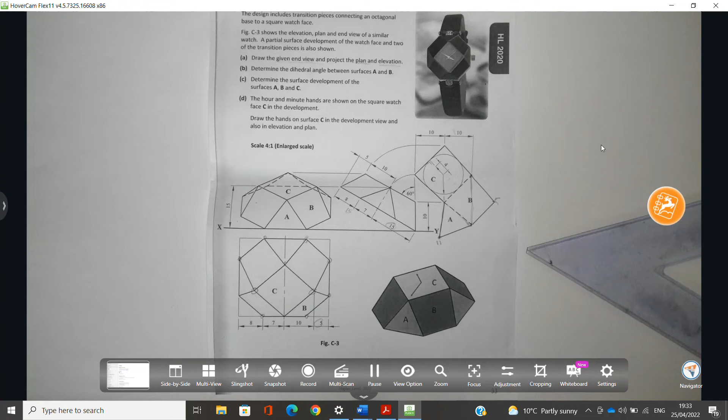Okay, so welcome to this drawn video on the 2020 higher level question C3. Okay, so surface geometry. Now it's based on a watch there. So the image on the right, design includes transition pieces connecting an octagonal base, so 8 sides, to a square watch face. Figure C3 shows the elevation, plan and end view of a similar watch, and a partial surface development has been shown.

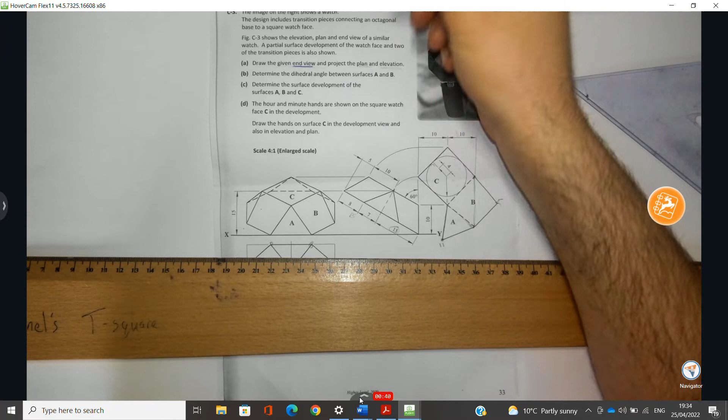Part A, draw the given end view. So that's a hint to draw the end elevation first. Then project a plan, so that's number 2. And 3, draw the elevation. Now, it's 60 degrees off vertical there, so the base is at 30 degrees. The scale is 4:1, an enlarged scale, so we have to multiply everything by 4.

So 15 by 4 is 60, 7 by 4 is 28, 8 by 4 is 32, 5 by 4 is 20, 40 there, and that's 40 there as well, and 10 by 4 is 40. Okay, so I'm going to draw my XY line in, and I'm going to draw my end elevation. So it's a vertical face here on the side, 10 high, so that's going to be 40 high,

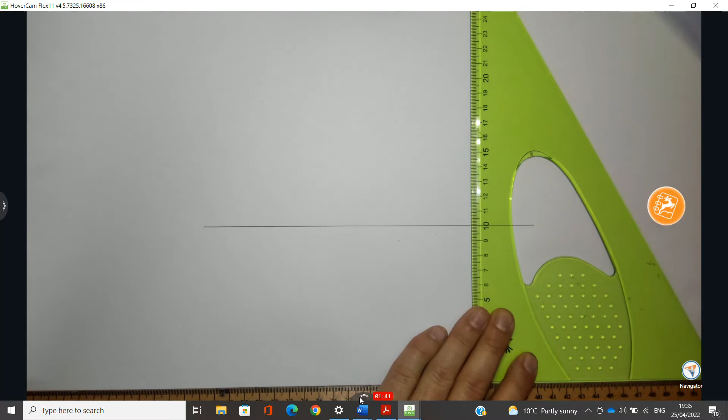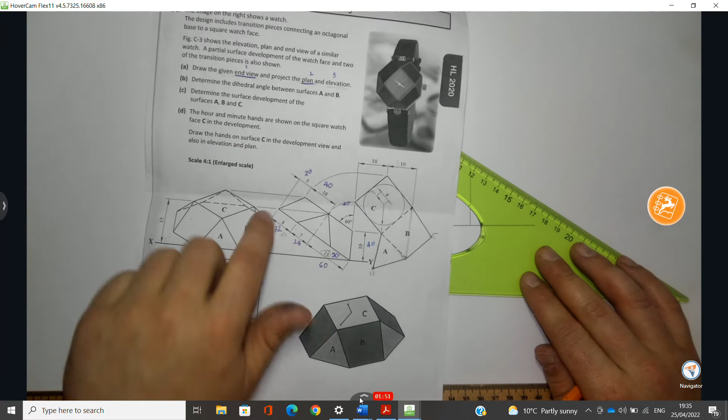and then on the bottom, it was 60, 28 and 32, that's 120. So I'm going to draw a line at 30 degrees, 120 long, and on the top it's 40 and 40, so added together is 80. You can connect them together. Then along the bottom, 8, so that's 32, plus 28 is 60, and then the same on the far side.

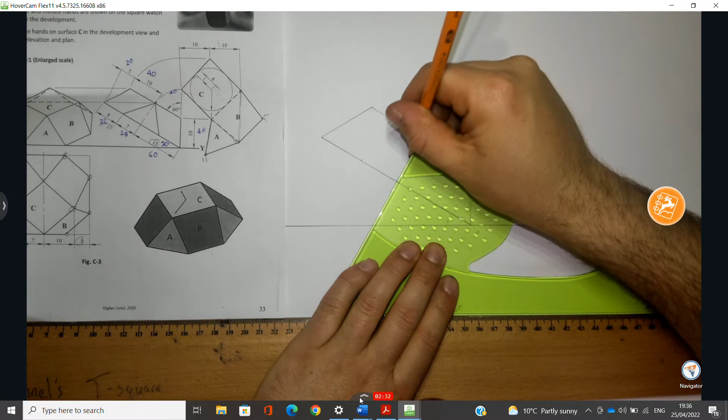So there's my center line, and there's one of the faces there drawn in. There's our end elevation complete. Just want to draw in a YY line. Now, the next thing we have to do is draw the plan view. And before I draw the plan view, I'll be labeling these points. So I'm going to call that A, B, C, B/C, D. So there's point D.

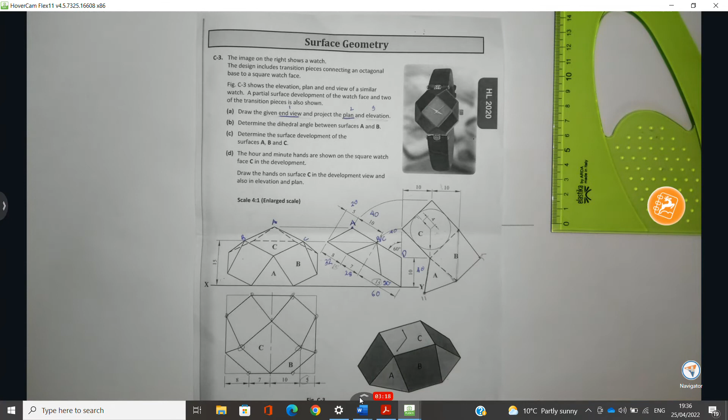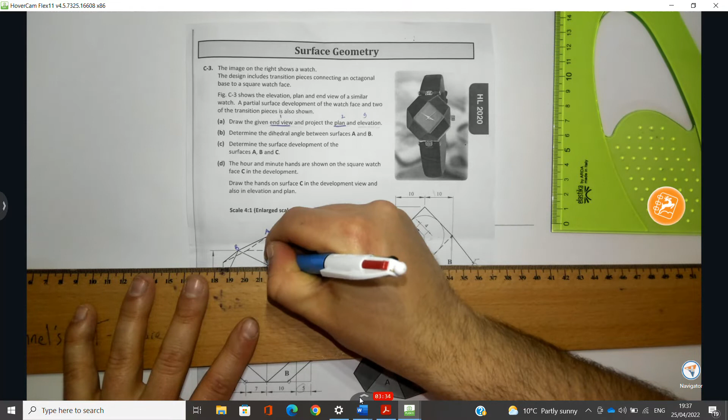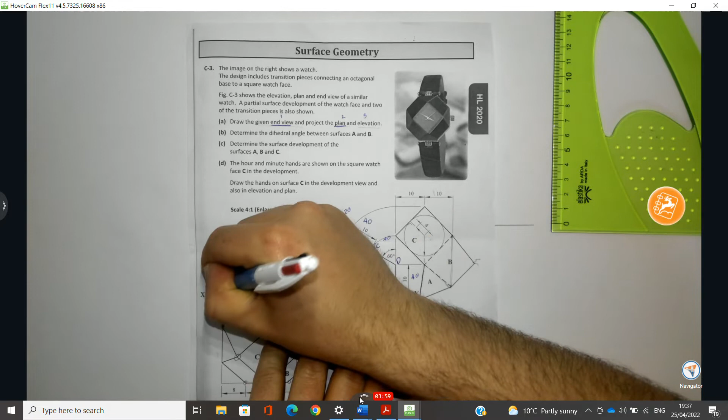If you were wondering where exactly point D is, what you could always do is use your exam booklet to help you judge where points are, but don't even think about measuring anything off it. D, E/F, so there's E, F, G/H, so G, H, I/J, and then K/L.

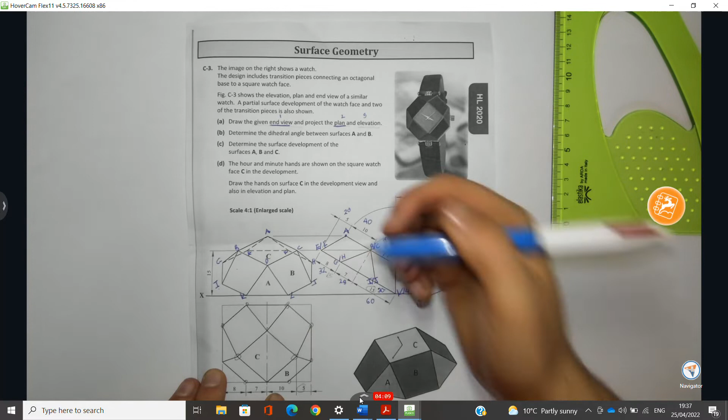Now, down in plan, again, this would be used to help you on your exam booklet. You could be doing this to help you figure out which point is which, because they're not easy to figure out for some students. Now, which one am I? Oh, sorry, I drew that 45 degree line there in the wrong place. So there's obviously going to be K and L. There's going to be point D.

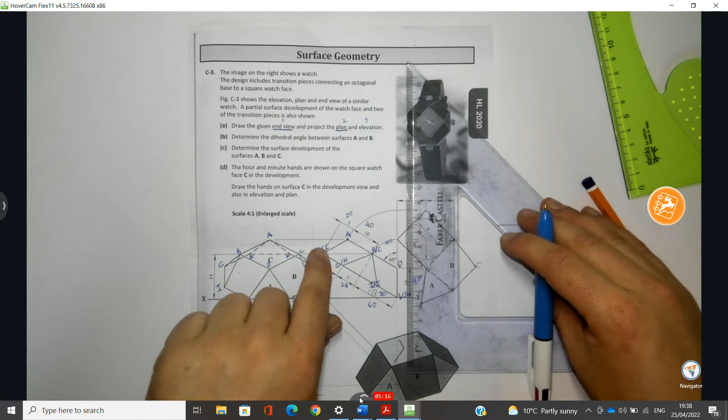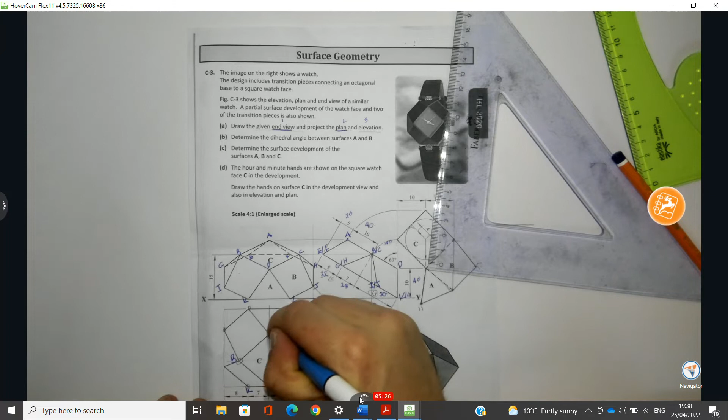So anything on the top face, like this is going to be B and C, and it's a square face there, and then the outside is the octagonal base, which is the bottom, and you can see B and C here when you bring them down and across, that's where you're going to get them. That's point A. Then this is I and J, and then G and H and E and F. So that's a good help to getting the letters in there. Right, so we get cracking then. B/C, D. I'm just going to pause this and write in all the letters.

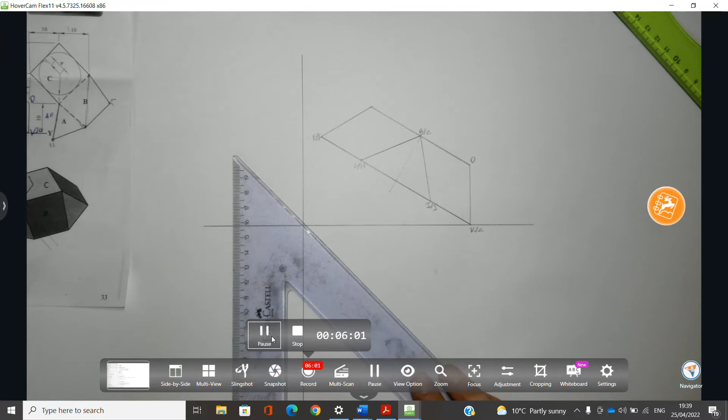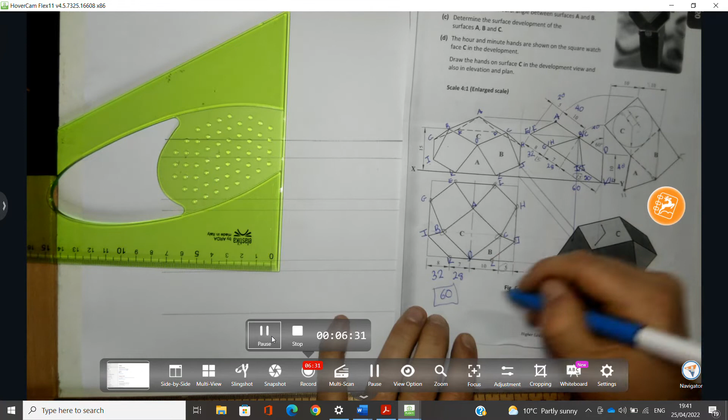Now that's done, I'm going to draw in my 45-degree line. I'm going to drop my points down from end elevation to my 45-degree line and bring them across to the plan. So that done, now I'm going to focus on drawing the plan view. So these are dimensions. 8 multiplied by 4, the enlarged scale, is 32, 28, so that's 60 together, 60 there again, and then point C is in 5 there, which is 20.

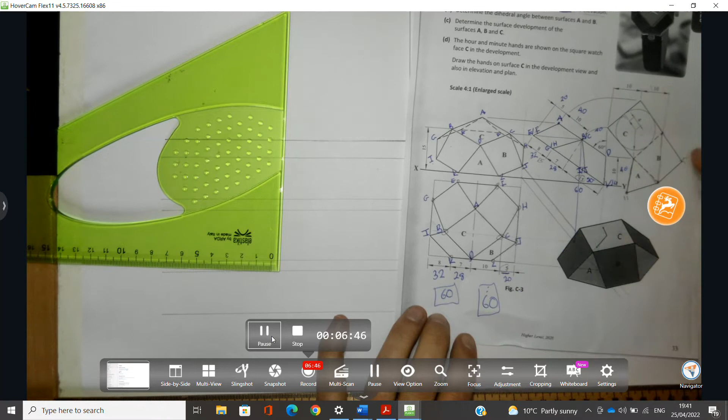Okay, so I'm going to set that out. So 120, center line there, 32, and the 20 there for the opposite side. And then our 5 in from the side multiplied by 4 is 20, then 32. And that's the end of it there. Right, so I'm going to project those lines up. And the width of it was 120. So I'm projecting these lines up.

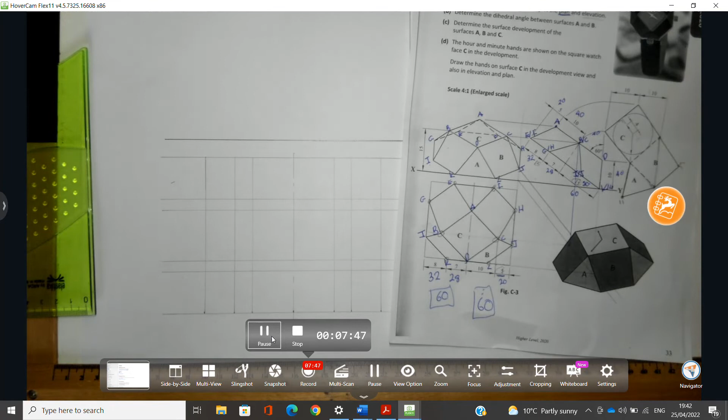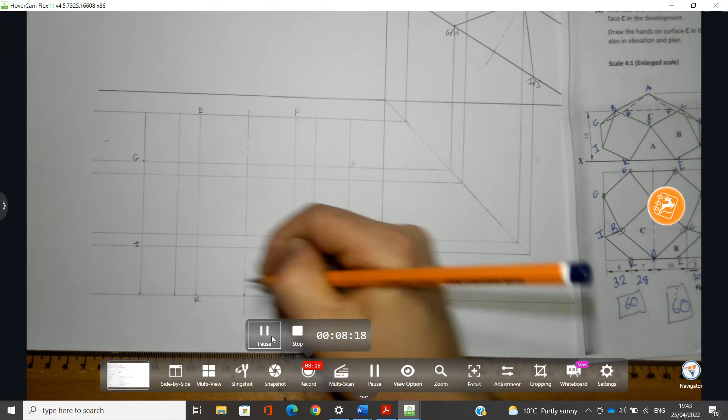So here we have letter E, F, then H, G, I and J, and then K and L and D. Right, so I'm going to connect them together.

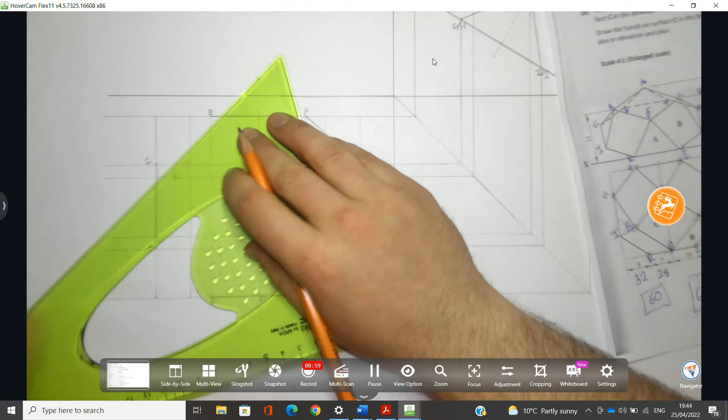Sorry there, my head hit off the visualizer.

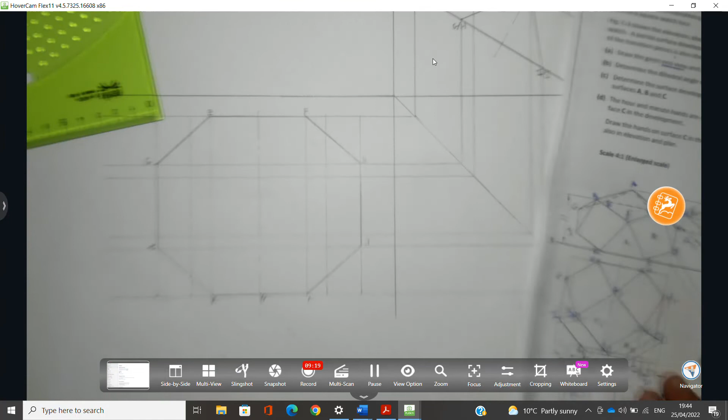Now, so we have them done. Now we're looking to get point A, B, C, and D is already gotten. So B and C down there, and it's where C and B will be hitting the, 5 multiplied by 4, 20, so they're in 20. So B and C down here, there's point C, there's point B, point A is down across in the center, and that's them ready to be joined together.

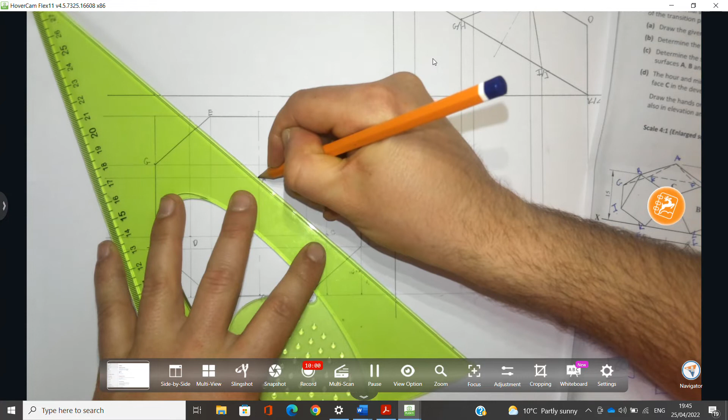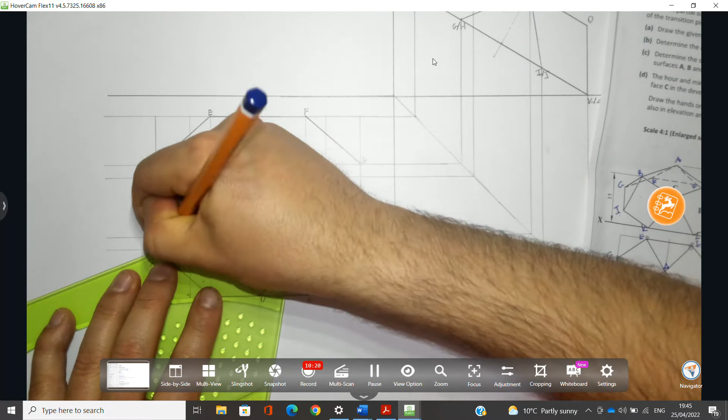So I can join A to C, C to D, letter D. Oh, sorry there, what I should call that should be B. Okay, D to B, C to I, C to H, C to J. Right, there's surface C, surface B, surface A projects as an edge.

Now, to draw the elevation, I'm going to pause the video myself. I'm going to bring these points across from the end view, and these points up from plan. And then I'll mark them in with you. They're brought up and across. You can mark them in.

Okay, A and D. E slash F. G. I. Over here J and H. And then K and L. Right, now we're ready to mark them together. So K to D and L.

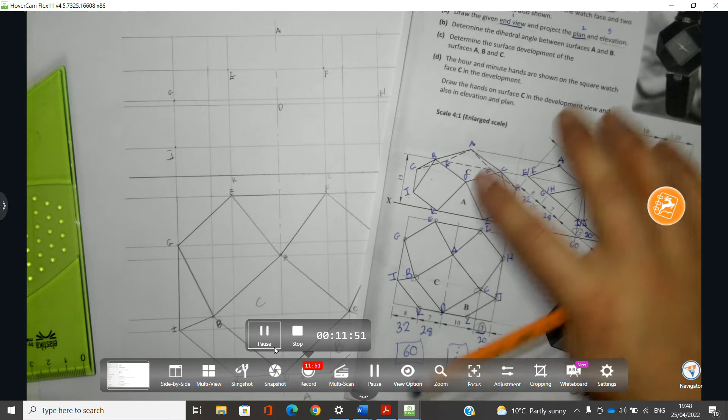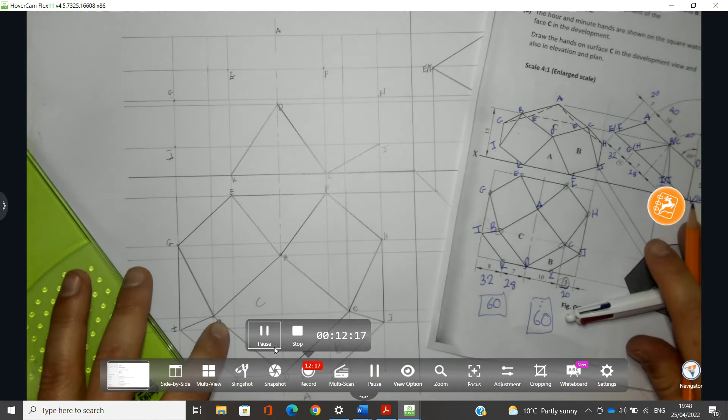L to J, C and H. Sorry, not L to J, C and H. L to J. And have I B and C marked in? I don't have B and C marked in, so I have to do that. So here's B there. And then C is there across.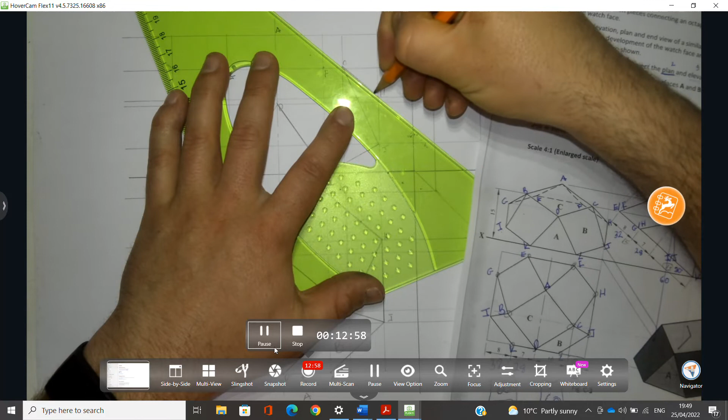Okay, now where was my train of thought there? Right, J to C, C to H and H to J. So J to C, C to H, H back to J. And C back to D. C to A. A to B. B to D.

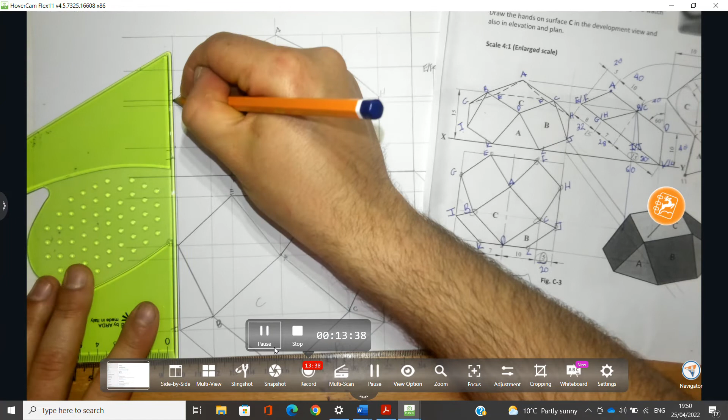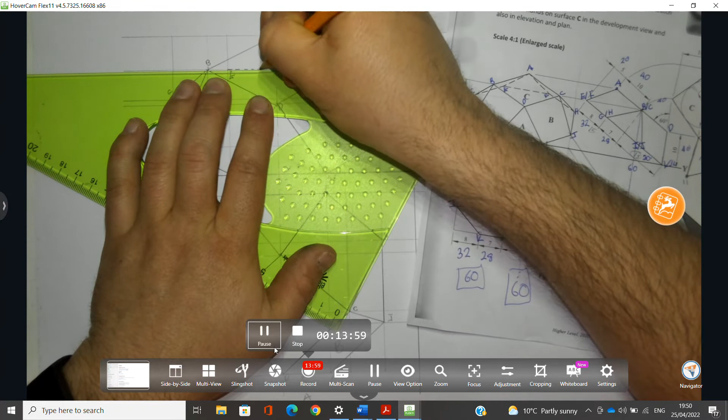B to G. G to I. I to K. And I to B. E to F as hidden detail. A to E. And then E to G and F to H.

Oh, you fecker. Right, I'll have to fix that there.

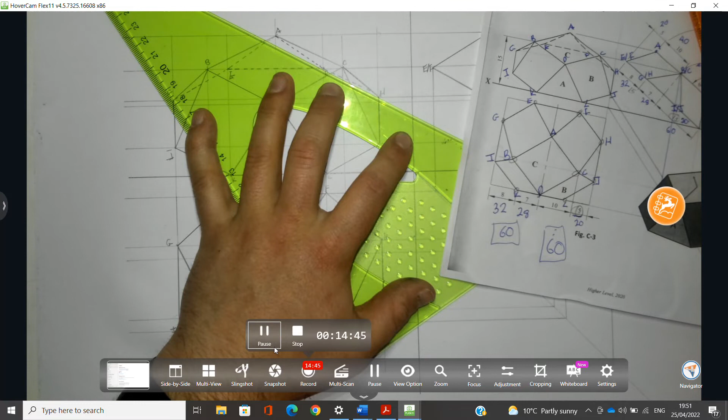So there's surface A, B, and C. Now, part B, determine the dihedral angle between surfaces A and B. So, you have to look for the line of intersection between A and B. Here's the line of intersection in elevation. Here's the line of intersection in plan.

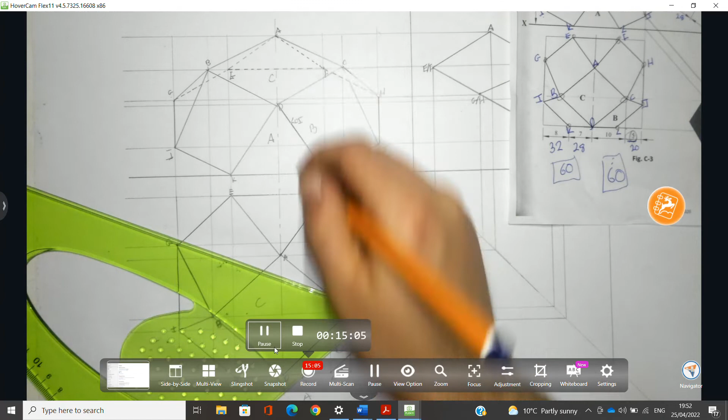You have to check, is the line of intersection a true length in either plan or elevation? And it is a true length in elevation. So line DL is a true length because it's parallel to the XY line in plan view. So I can look along that line of intersection DL immediately. So many people would try to look perpendicular again to DL, and it'd be immediately the same thing in elevation.

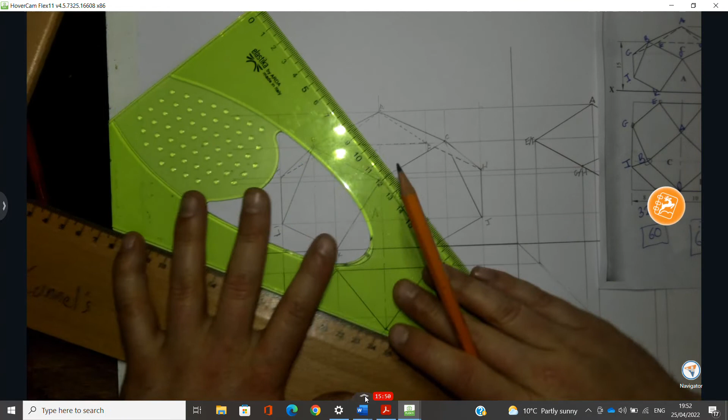So I'm going to look along line DL here in elevation, which obviously is unusual to most students because they're used to looking along the line of intersection in the second auxiliary or projecting from the plan view. So I'm going to draw in a line parallel to DL from points K and J as well as D and L. I'm going to draw in an X1 Y1 line.

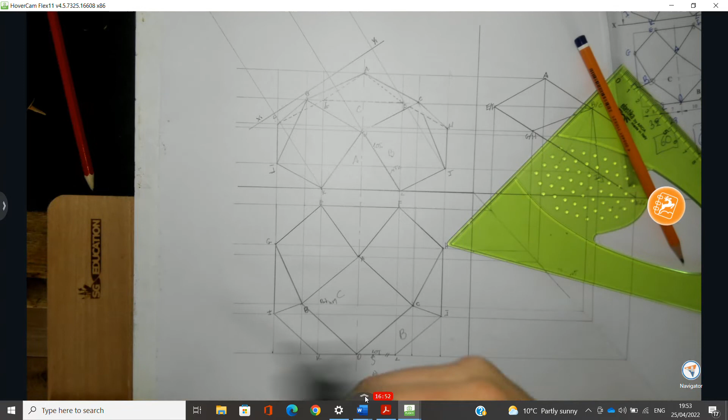Now I'm going to take the distances from my XY line down to plan. I'm going to use a datum line because it would require a fair bit of room. So I'm just going to use this as a datum line. I'm going to get my compass and take the distances from the datum line down. D and L are going to project as a point. Just going to mark that in. That's D slash L.

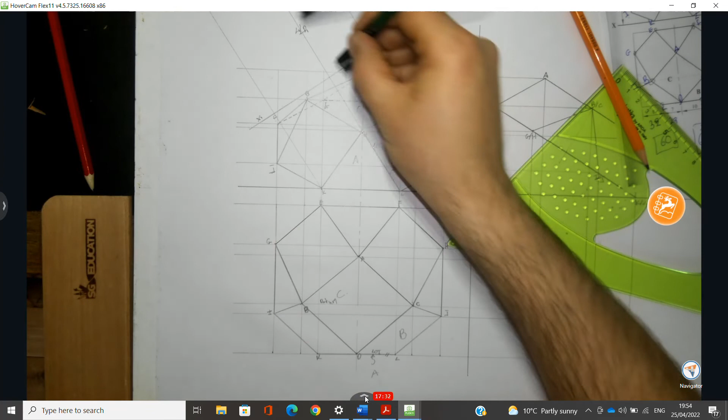D1, and then I'm going to take the datum line down to J. Here's the datum line down to J. Lift, follow J here. Mark that in. That's J1, and then I need to get K. Okay, and that's going to be the same distance as D and L. I'm going to project mark from K. So there's K1.

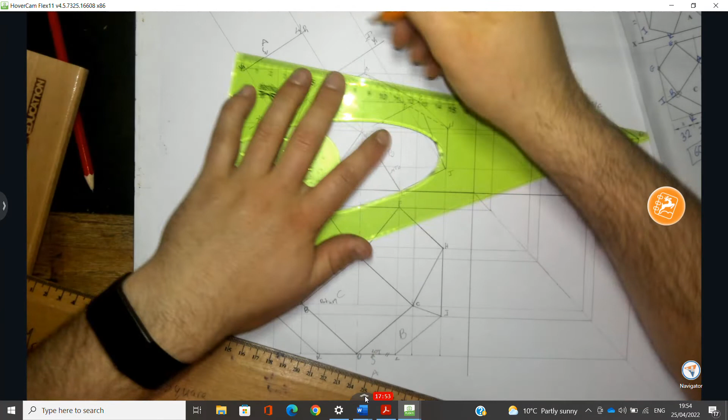So there's surface A as an edge. Okay, here's surface B as an edge view. Okay, and then I'm going to measure the angle between them. So I'm getting 143. So 143. Okay, now part C.

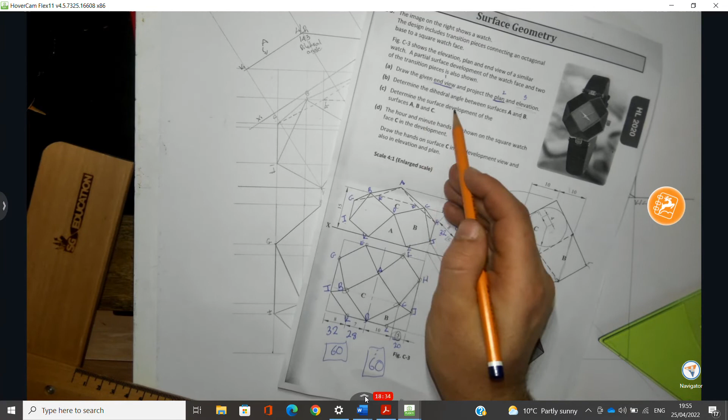Okay, determine the surface development of surfaces A, B, and C. So this is the partial surface development, and remember what side. Oh yeah, you would have been able to see that dihedral angle. Hope so. Anyways, right. Remember what they give you on the question is your greatest hint. So look what they've done there.

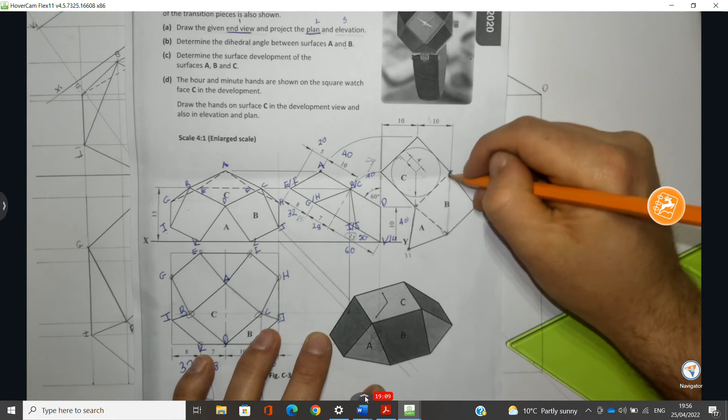They've rotated surface C up, okay, until it's vertical, and then they're projecting a view perpendicular to that, and there's the surface development. So surface C is easy enough, and then A and B we can find using triangulation, by splitting the quadrilateral up into two triangles.

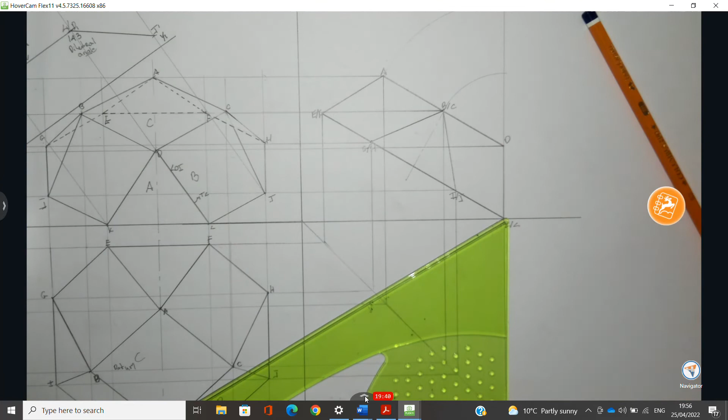Right, so I'm going to draw a vertical line from D, and I'm going to take my compass, rotate B and C up onto that vertical surface, and then I'm going to project parallel to the XY line. Sorry.

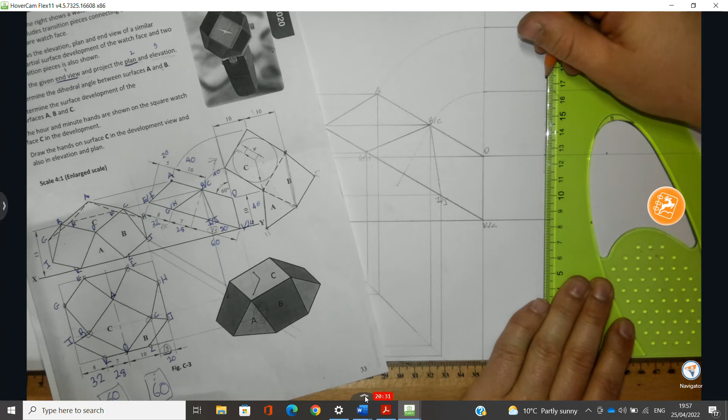So they tell you a dimension of 10 and 10, so that's 20 in total, multiplied by 4, scale 4:1 is 80, so I'm going 80 in total. There's the center line. It's obviously going to be a square.

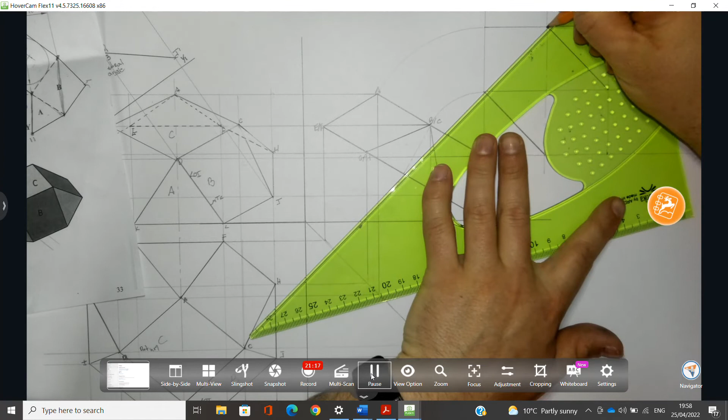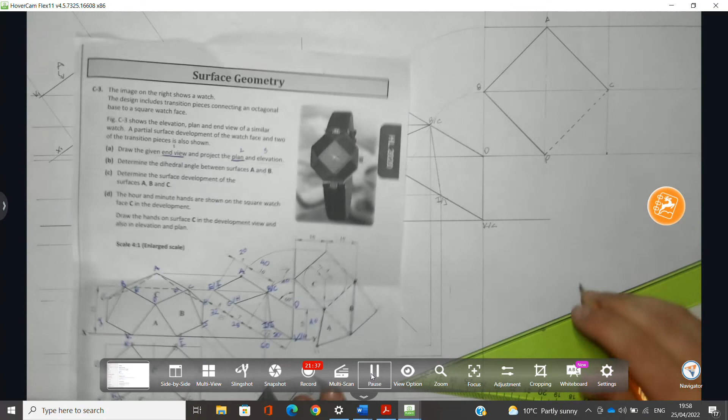Here's the fold line. Now, okay, so that's surface C. Alright, so that's A, B and C, and that's point D. So that's B, A, C and D. So we have D, we have A up here, B and C. Okay, now we need points K and L on surface A.

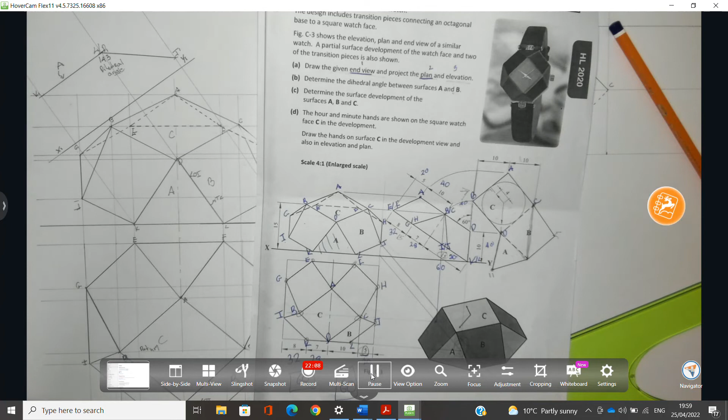Now this is the true shape here in elevation because it projects as an edge in plan and the edge view of surface A is parallel to the XY line, aka the vertical plane. So D to K and D to L are already true lengths, and so too is K to L because it's parallel to the XY line in the plan. So to do surface A, I'm going to take D to L here. It's true length in elevation. This is what developments is about, being able to recognize what true lengths you have and how to find them.

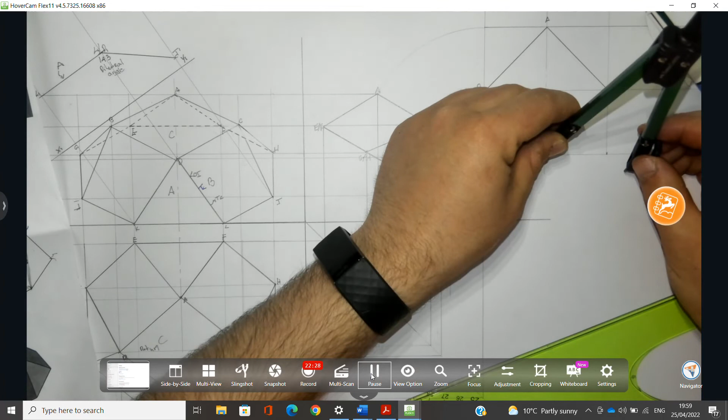So I'm going to swing an arc with the radius of D to L there, radius D to L. Now, somewhere along that arc is point L, but where exactly? Now I have point C on surface B, and I can find, sorry, what do I call that letter? That's going to be D, K, and then L, yeah. So I can find the true length of that line C to L. So what we're doing is splitting surface B, a quadrilateral, into two triangles.

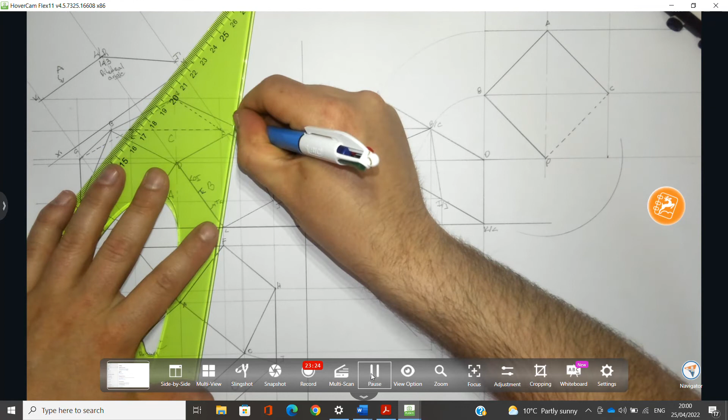So here's the line. Here's the line C to L in elevation. Here it is in plan, C to L. I'll move my visualizer now. So I'm going to find the true length of that line C to L. So I can take my compass, rotate C to L in plan until it's parallel to the XY line in plan. I'm going to bring it up.

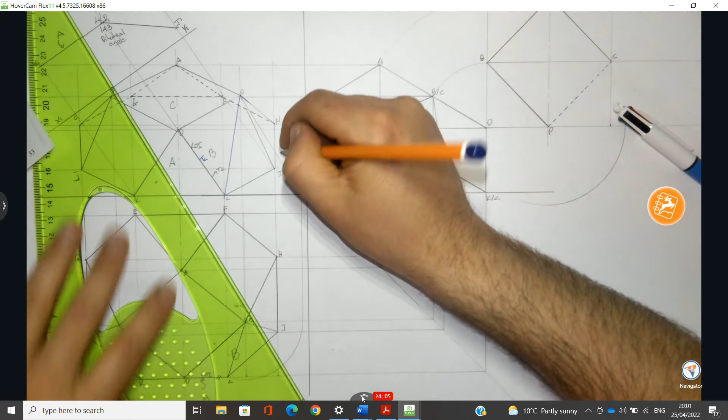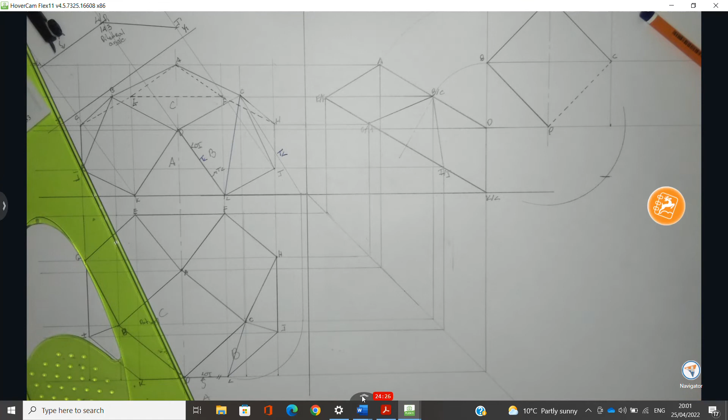Until it hits the XY line because L is on the XY line, and join back to C. Now here is the true length of C to L. So I'm going to take that distance with my compass, the true length of C to L, and I'm going to swing then from C. Now, there is point L on surface A, so I can join them together.

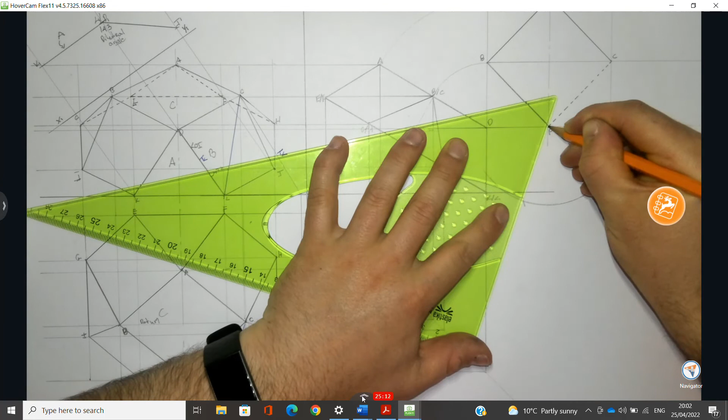Okay, now I can continue that arc. D to L and D to K are the same length, because they're symmetrical. So now to find out where K is, I can take L to K in elevation because it's parallel to the XY line in plan, or I could take L to K in plan as it's parallel to the XY line in elevation. So I can swing that there from L and join D to that. Where that arc swung from L intersects this one, swung from D, that is point K. And I can join them together.

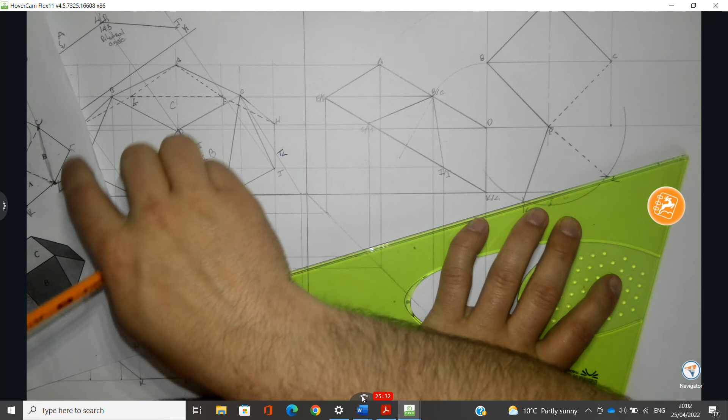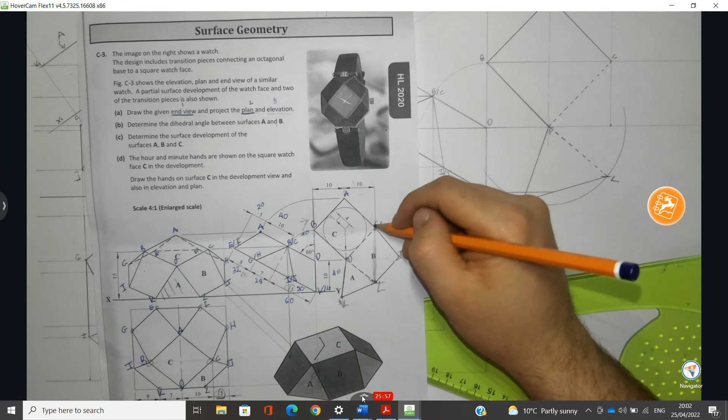Now, the next thing we have to do is find the final letter on surface B, which is going to be point J. So I'm just going to join them together. So I need to find, on surface B, point J. Right, so I have point C. If I can get the true length of L to J, I can split this into a triangle as well. D to J is the easiest way to find it. You could find the true length of C to J either, that's fine. I think the longer the lines are, the quicker and more accurate it is. So I'm going to join D to J.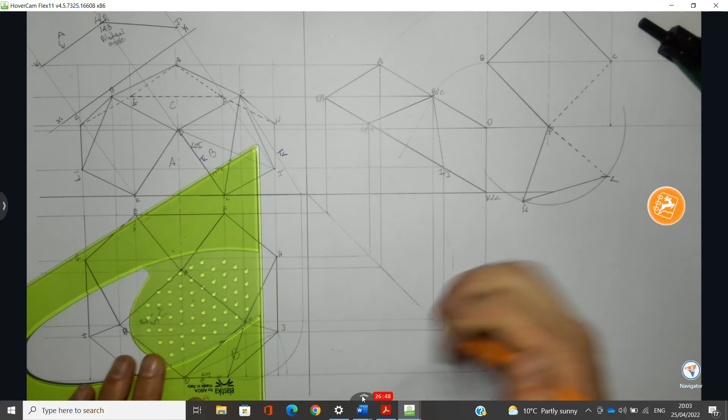I'm going to rotate D to J in plan until it's parallel to the XY line in plan. So there we go. And here's the true length of D to J. So I'm going to take D to J there. I'm going to swing an arc from D. Now somewhere along that arc is point J.

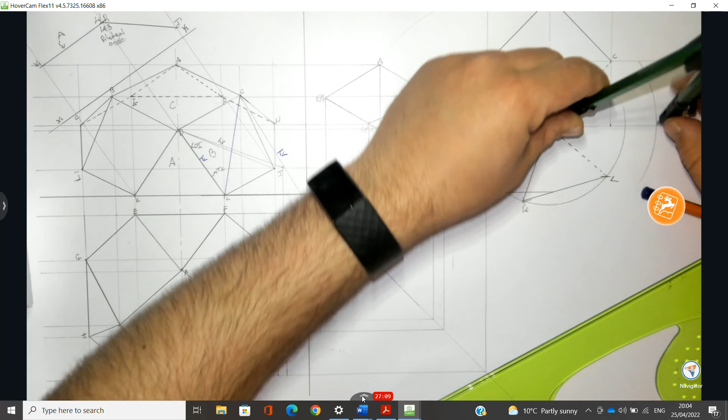Now I can get the true length of line L to J. So I'm going to take line L to J. Careful not to mix it up with anything else. I'm going to bring this up then. So here's the true length of L to J. An alternative way you could find it is using an auxiliary if you feel things are getting a bit overcomplicated. So there's the true length of L to J. I'm going to swing an arc there until it intersects here. I'm going to join them together.

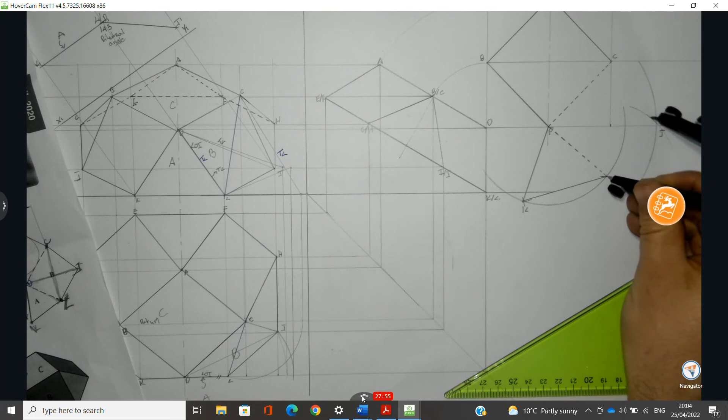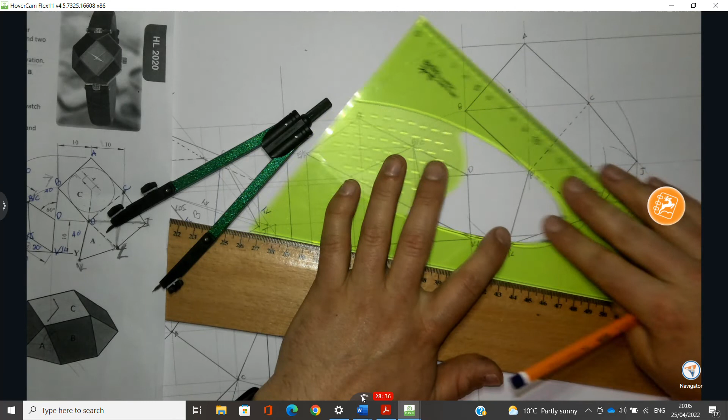Now, then we have to do the clock hand. So we're going to do that now. Part D: the hour and minute hands are shown on the square watch in face C in the development. Draw the hands on surface C in the development view, and also in the elevation and plan. Right, so here's the radius of the clock. The small hand is a distance of 4 on our drawing, so that's 16 on our sheet, and then the minute hand is going to touch the base of the circle.

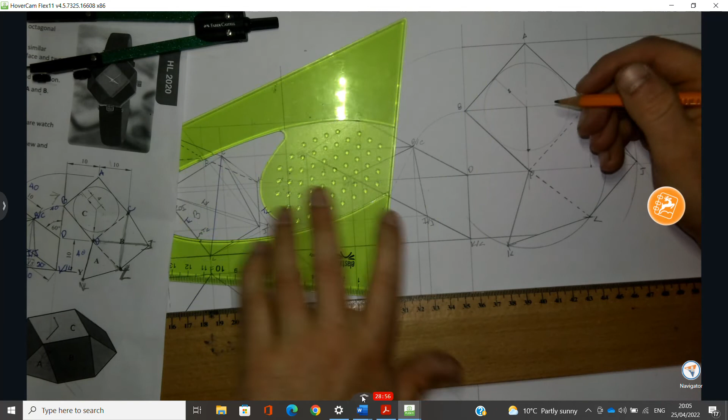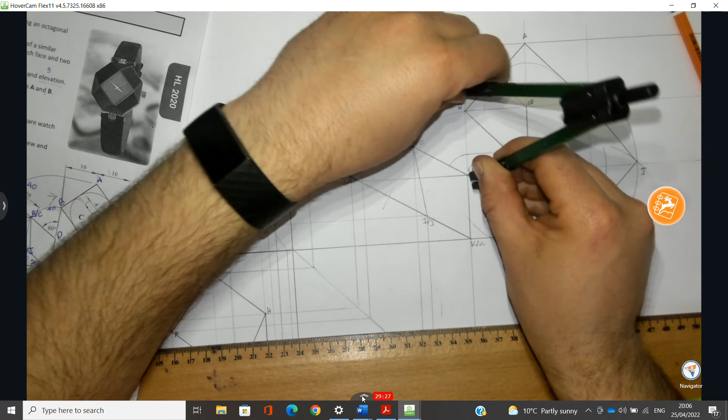So there we are, there in our development view. Now what we have to do is rotate those points back on to the surface C in our end elevation. M, CP, and N. Put my compass on D. So I'm rotating them back. So there's point M, and there's point N. So I can drop these down, but they're not that easy to locate yet.

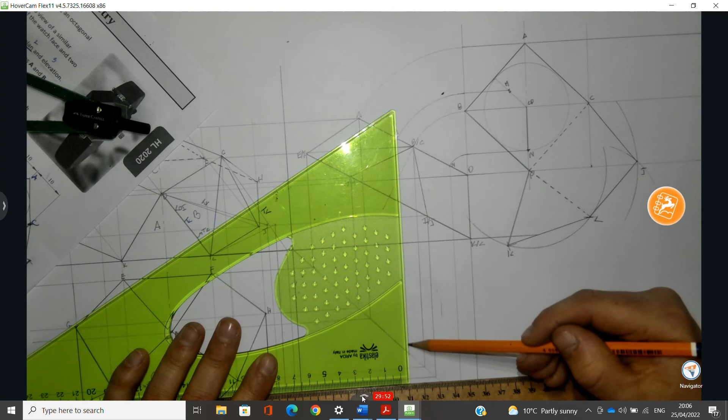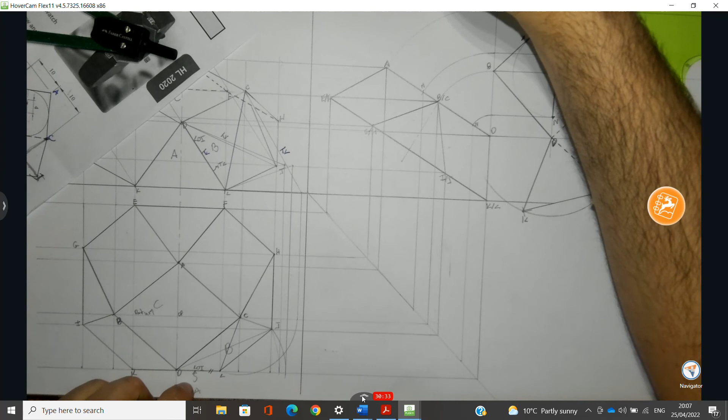Okay, now we know these points are going to join to the center. So I'm going to call that X, and that point is on D. So D obviously joins up to here. So to find N, N joins the center point, and the center point there is in line with B, and across there's the center point of the face. It may not necessarily be in the face in plan view. We'll just move the visualizer a bit. Down across with N.

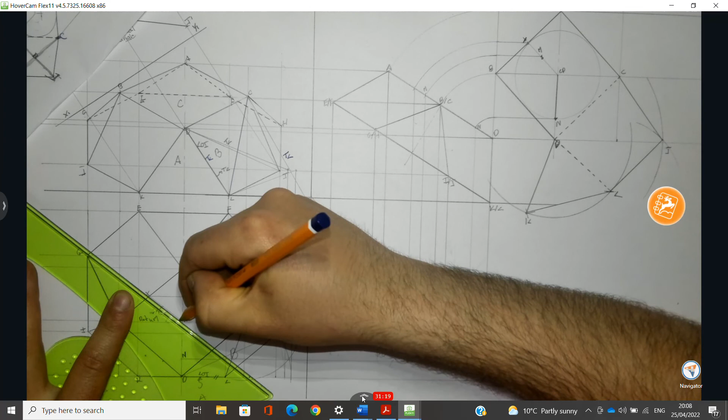Here's point N. Now point M is not so easy to find. So I'm going to bring point X over until it hits the end, rotate X down. Letter X is on line A to B, so I'm going to bring letter X to line A to B in plan view. So there's letter X, and then that can join to the center point. And then letter M down across to touch that line. So there we go, and then we can project that up to our elevation.

So here's letter M brought across. Letter M. There's the center of the face. And letter N. Now, there we go, and that was a good bit of fun.